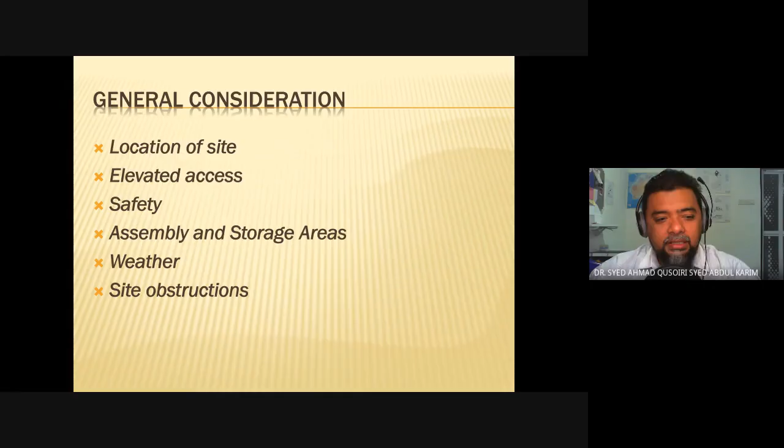So, general considerations of a large span building. There are a couple of them listed here: first is the location of site, elevated access, safety, assembly and storage areas, weather and site obstructions. So first, the location of site.

These large span roofs are often used in stadiums, halls, factories, and other buildings where people can assemble in large numbers. So when we talk about large span buildings, it will involve construction of large span roofs. Most of them likely do not want any type of obstructions, whether for the views of the audience or for the placement of equipment and materials.

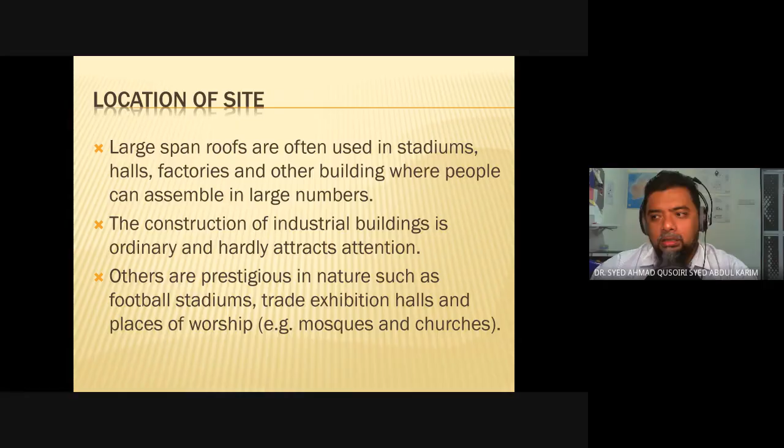The construction of industrial buildings is ordinary and hardly attracts attention because, let's face it, these types of buildings are not as eye-catching as other types of building. Others are prestigious in nature, such as football stadiums, exhibition halls, and places of worship. These are the large span buildings which have a lot more flair to them, so normally they are given a lot more attention in terms of their construction and their designs.

Some buildings are located in built-up areas where the original buildings on the site had been demolished for new buildings. So these are some of the redevelopment projects.

Such sites will face the same problems associated with high-rise buildings in congested sites, such as logistic restrictions, trespassing, security, safety issues, and complaints from neighbors. The project team has to come up with a way to resolve these matters. If the building is a large, prestigious construction, there are normally a lot of cost penalties if completion is delayed.

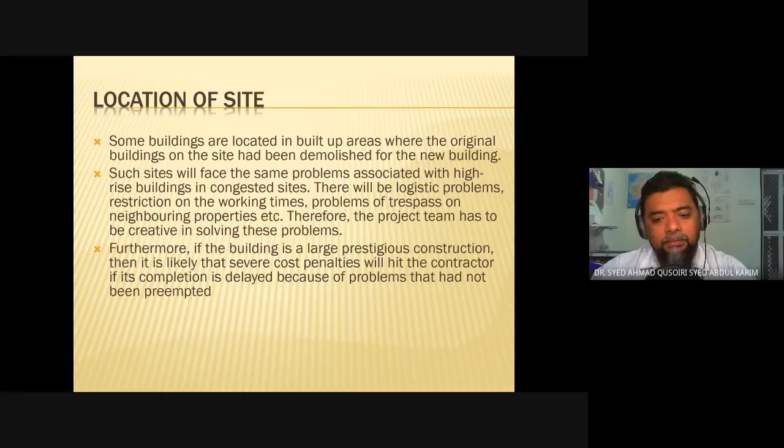Next is in terms of elevated access. Large span roofs have high headroom of from 10 to 50 meters high. So 10 to 50 meters — 50 meters is very high.

So whether the roof is assembled complete or in portions at the ground level, then lifted to its final position — the way they build this large span roof is either assembled at their final position, or assembled at ground level very near to their final position, and then lifted and installed at their final position.

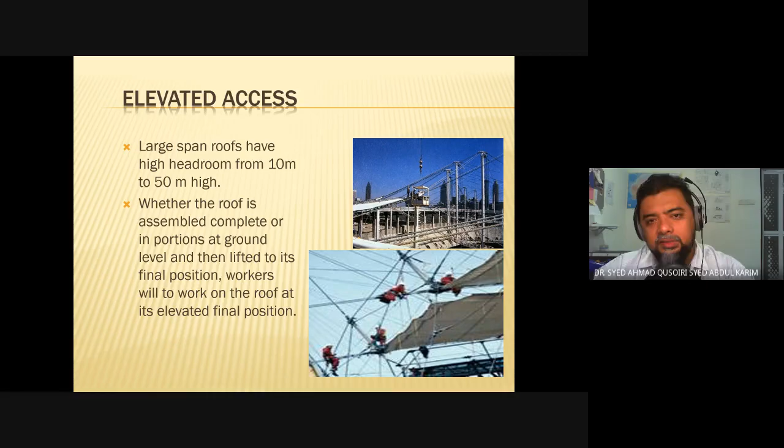However, the second method is the safer method. So elevated access such as ladders, scaffold, and hoist have to be erected, along with mobile scissor lift platforms — these are some of the equipment they utilize to install and maintain those elevated roofs.

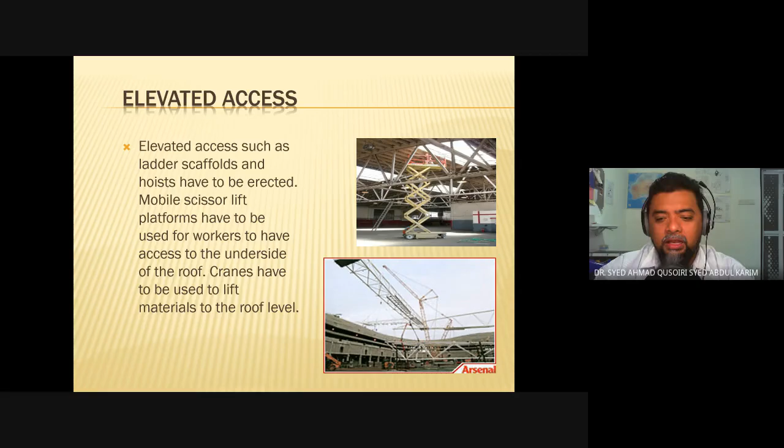We also have cranes, used to lift the materials. And then in case of suspension structures, workers would have to pull themselves up to the roof and abseil down, which involves issues of health and safety.

Hoists will be impractical because of the cables, so this has to be delicately installed. The workers have to balance themselves on the cables that have already been installed so that other cables may be installed. So when they have installed the primary structural cables for the roof, they will have to install the secondary and tertiary cables — this is when we need those workers.

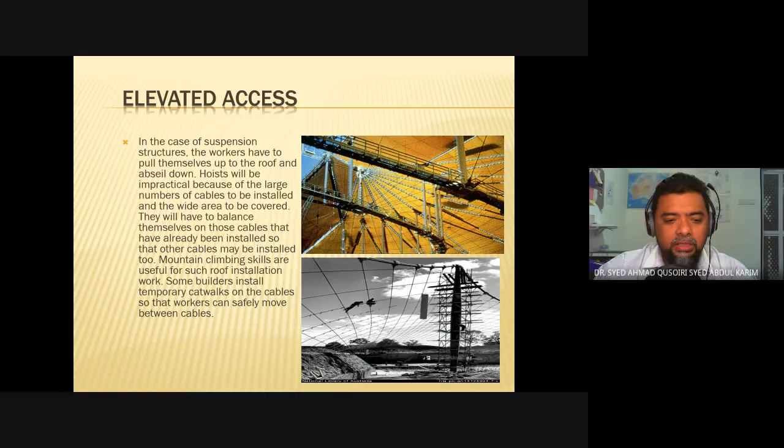Normally, this kind of job is reserved for specialist contractors and specialist workers. Mountain climbing skills are useful for roof installation. Some builders install temporary catwalks on the cables so workers can move safely.

In terms of safety, obviously working at heights is dangerous, so they have to have a lot of safety measures to prevent accidents and death due to falling objects and workers. At certain intervals, they would install safety nets, and workers working at height would have to use safety cables. Safety policy has to be rigorously implemented on site.

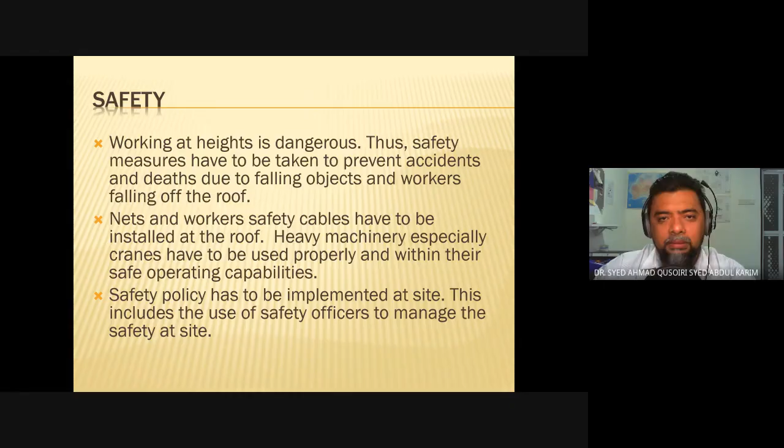Then we have the assembly and storage areas. The production of structure is either in situ or prefabricated, depending on the type. RC large span roofs are still being used for elevated water reservoir roofs — these are some of the types. They are no longer popular for roofs of stadiums and halls because of the development of material technology; we now have other types of material that can last as long as reinforced concrete roofs.

Roof covering has to be inspected after installation, so they have to walk and physically, visually inspect those coverings. Roofs with curved surfaces make it difficult to walk, so workers have to have their safety lines installed and used at all times.

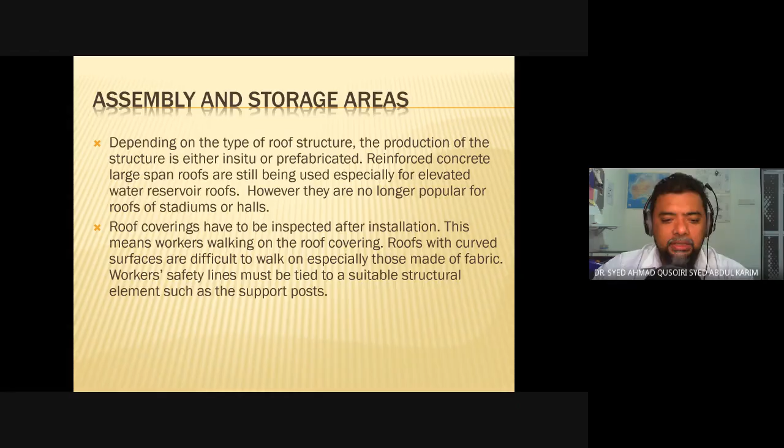So the two possible approaches are these, as I mentioned earlier. First of all, the roof being fully assembled at ground level and then lifted up by crane, jack or winch to its final position. The assembly area is directly below the final position. This provides a lot of access for the workers to install the roof, and is also a lot safer.

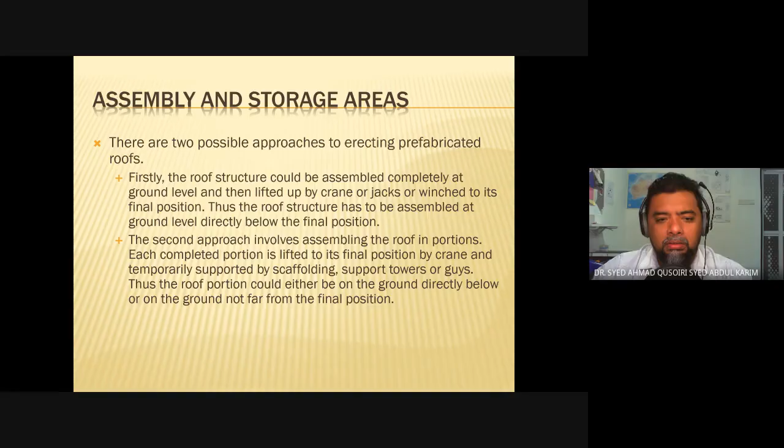The second approach is assembling the roof in portions. Each completed portion is lifted to its final position by crane and temporarily supported. The roof portion could be on the ground directly below, or not far. Okay. So those are the two solutions.

In terms of the components, they must be transported from the factory to where they need to be installed. This limits the size of the components; we cannot have a very large component. Then the components will be stored and inspected, which requires large areas on site to store them. The contractor also has to provide a suitable assembly area for the final installation of the roof.

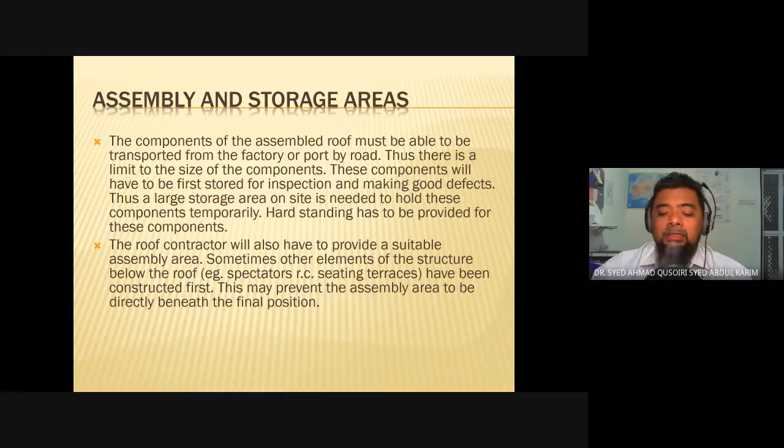Other elements have to be installed first, such as spectator or seating terraces. This may prevent the assembly area of the roof from being directly below the final position, so they have to move to an assembly area not directly beneath, but near its final position. Over here you can see the roof structure, and we have this temporary support or temporary column to support the roof while it is being constructed, and it will be taken out once the roof has been completed.

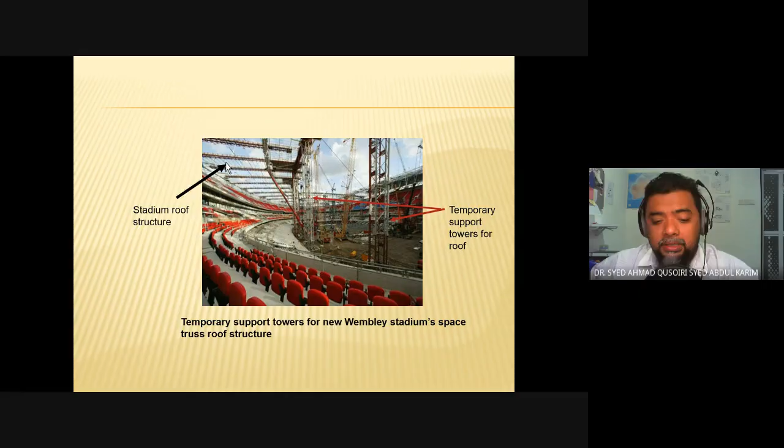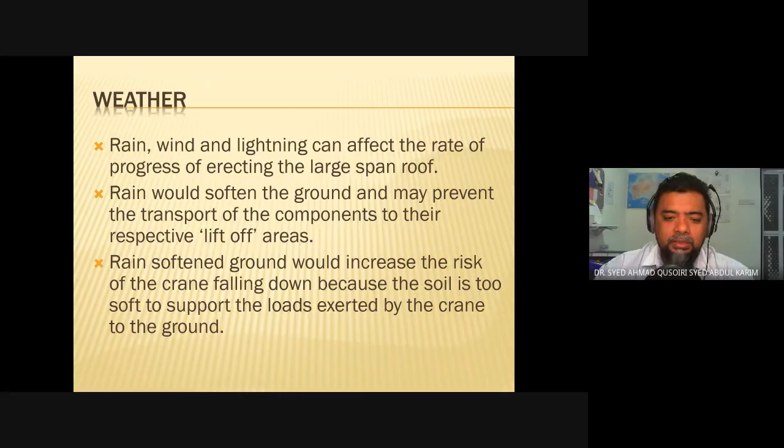Next is weather. Obviously rain, wind and lightning can affect the rate of progress of erecting a large span roof. You do not want to be doing any heavy lifting works in these kinds of conditions. Rain will soften the ground and may prevent the transport of the components to their respective lift-off areas. This could increase the risk of the crane toppling because the soil is too soft to support the loads exerted by the crane on the ground.

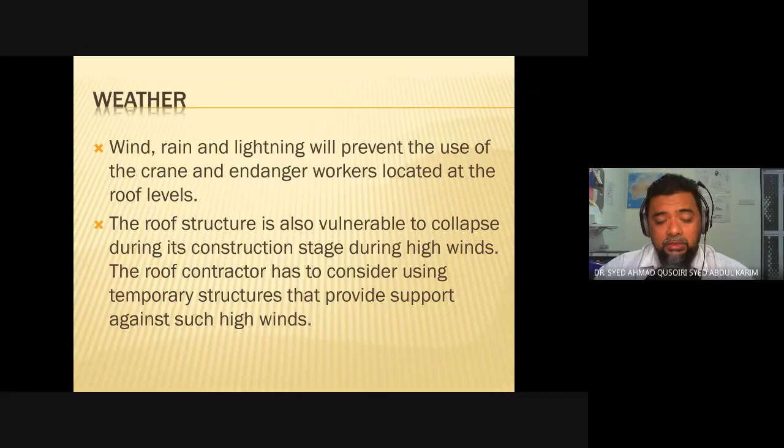Wind, rain, and lightning will prevent use of the crane and endanger workers. The roof structure is also vulnerable to collapse, so you do not want to be doing long span roof construction during the rainy or thunderstorm season. It is vulnerable to collapse during high winds, so that's why they have all those temporary structures to provide extra support to the uncompleted roof.

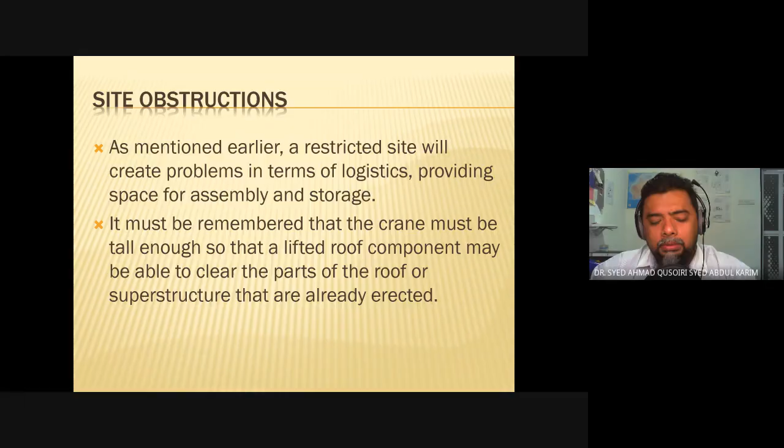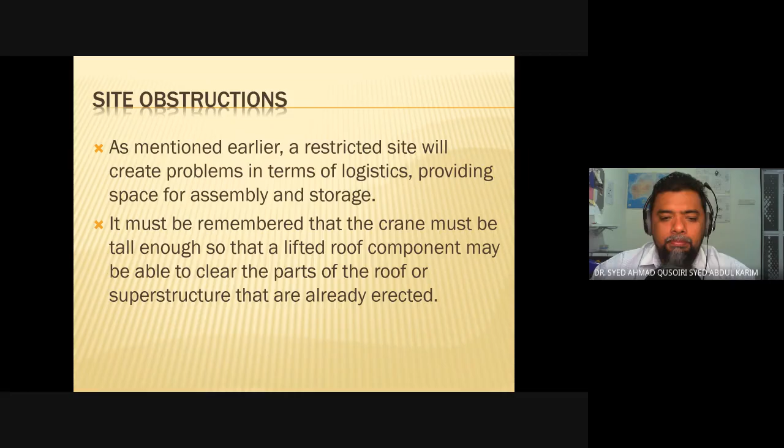Next is site obstructions. A restricted site will create problems in terms of logistics and providing space for assembly. Here the project manager has to be able to make use of the available space on site. Okay? It must be remembered that the crane must be tall enough so that a lifted roof component is able to clear parts of the roof or superstructure.

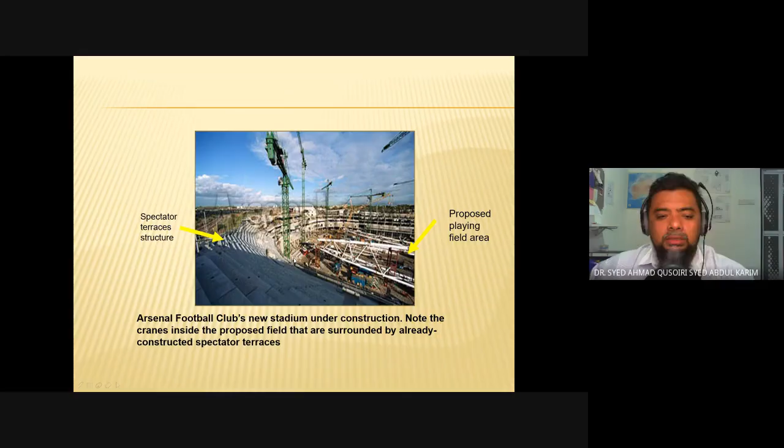Next is dome construction. These are special buildings. Basically, the dome is a three-dimensional arch. The arch is one of the strong elements of the structure, widely used in ancient times to create large span roofs. The roof covering was placed over a row of arches to create a large span roof. So this is the second oldest method of providing a roof that has a great span.

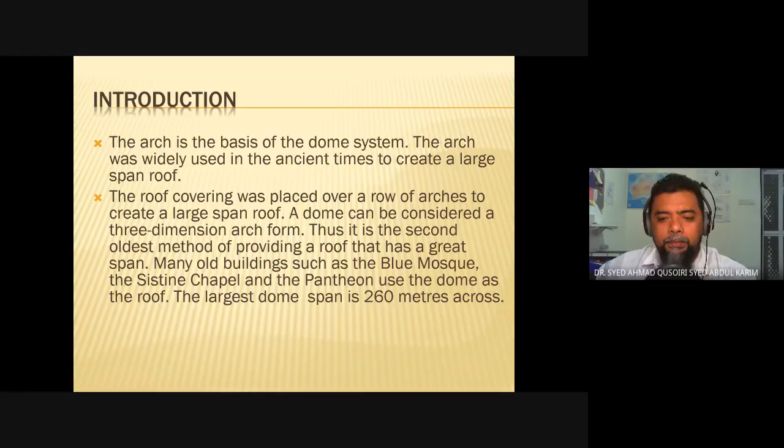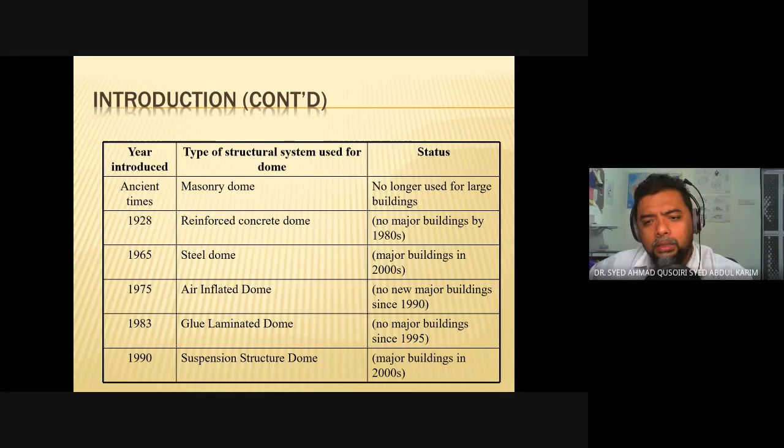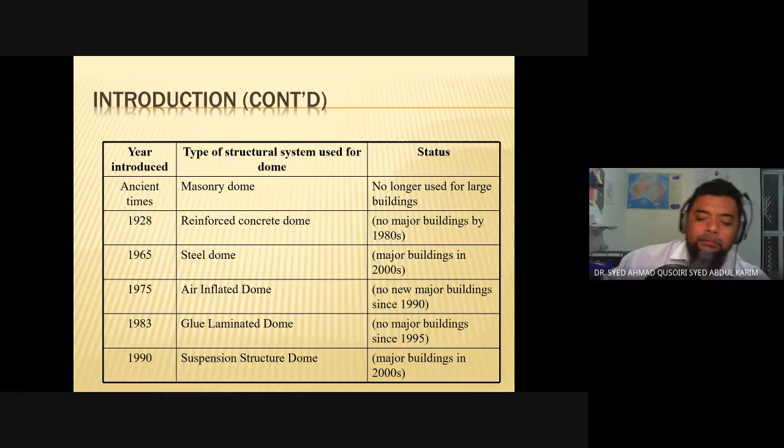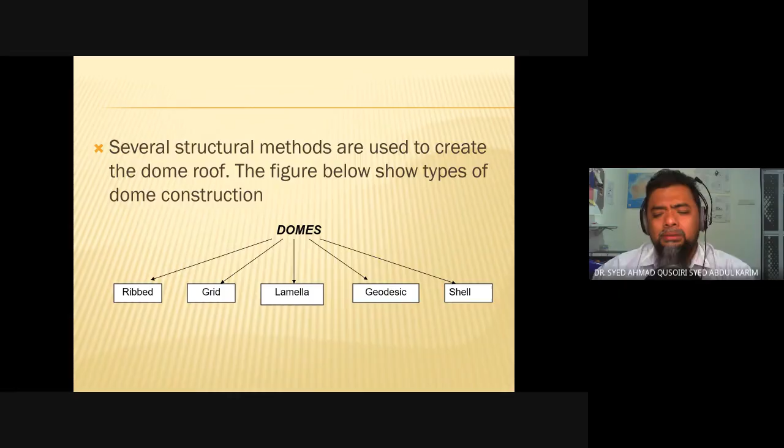Several structural methods are used to create the dome roof. These are some of the types of domes available. The rib dome consists of an arrangement of rib members on a ring beam support that converges on either a crown connector or crown compression ring. So that is the ring beam we are talking about. If it's at the top, it's known as the crown ring.

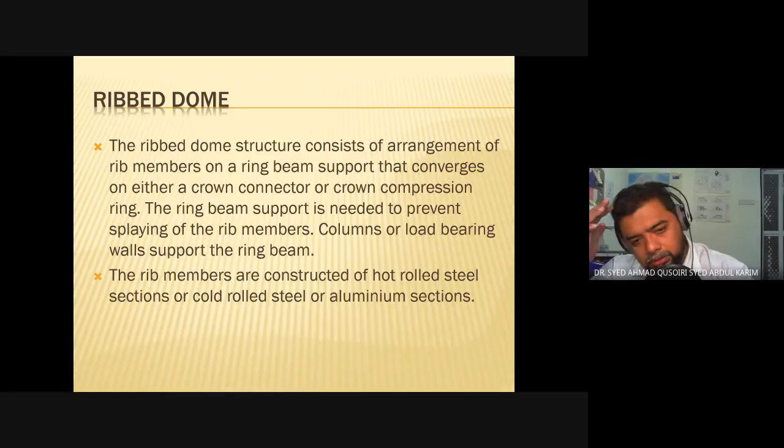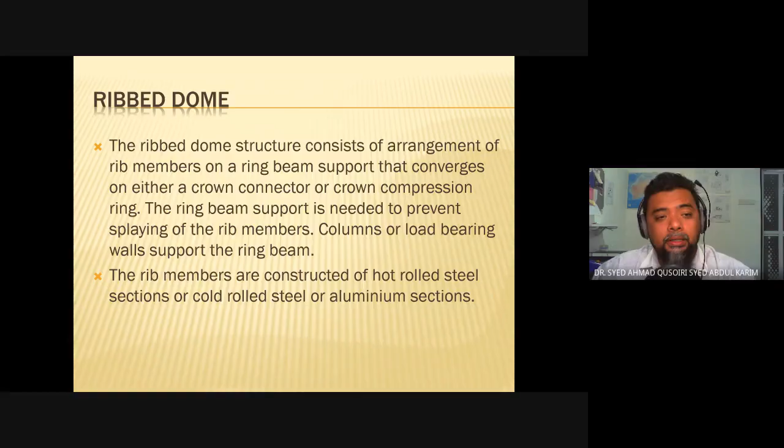So the rib members are constructed of hot rolled steel sections. This depends on the design of the buildings. The material for the ribs can be anything. Okay. So in rib domes, the framework of the rib members must be braced to provide rigidity, thus resisting the wind loads acting on the finished dome.

So the rib members are connected together by this ring beam. So you can consider the rib as the columns and the ring beam as the actual beam. They need each other in order for the dome to be stable. So purlins are installed on the ribs to support the roof cover. This is exclusively for the purpose of placement of roof covering.

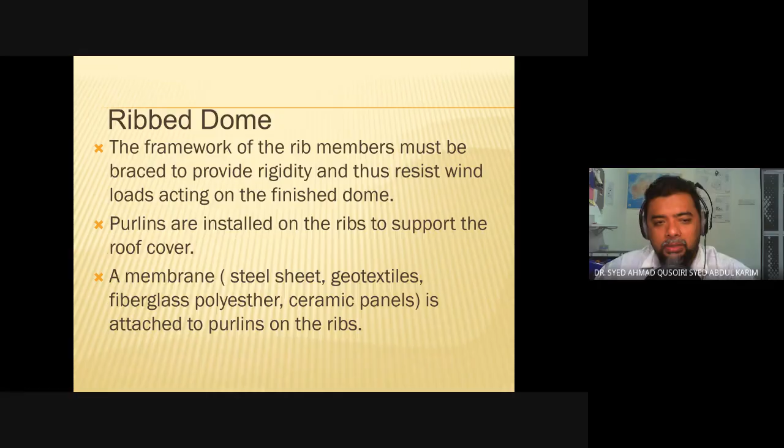A membrane, either made out of steel sheet, geotextile, fiberglass, polyester, or ceramic panels, is attached to the purlins on the ribs. The membrane provides a weatherproof roof cover over a dome. A false dome ceiling is then attached to the underside of the framework.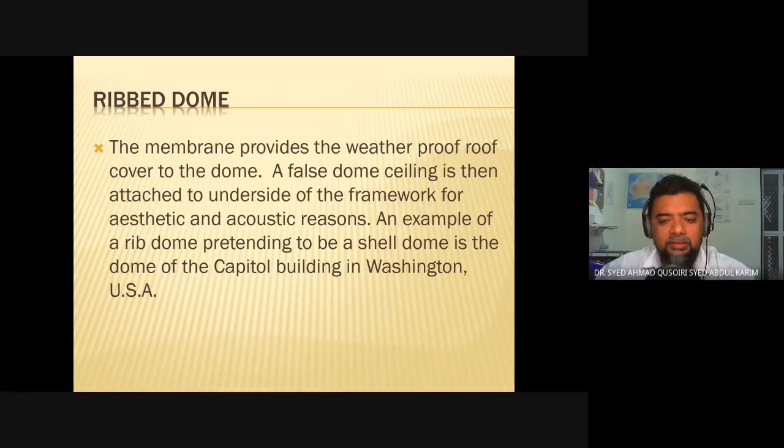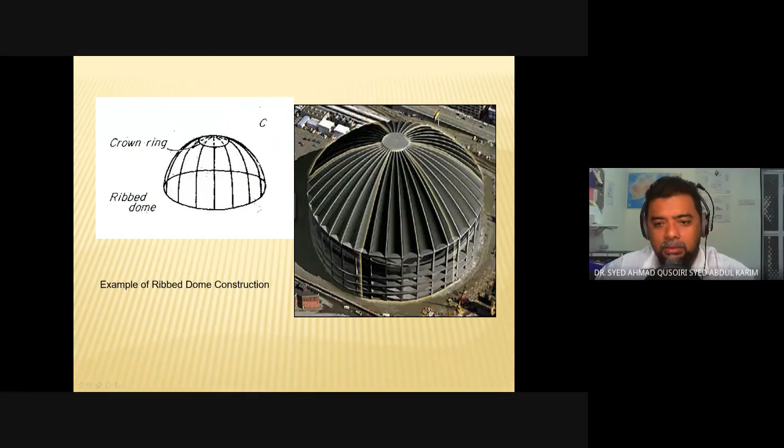And so that is the example. This is the structure itself. Obviously, there will be a lot more ring beams. And the dome again depends on the design.

Next, we have the grid domes. So this is an innovation from the flat grid roof types. So this is the grid dome. A grid framework is curved to provide the dome shape. So instead of a flat grid, we now have a curved grid, so it becomes a dome. A ring beam is provided at the base again to transfer loads of the beam to the supporting column, wall, or the foundations.

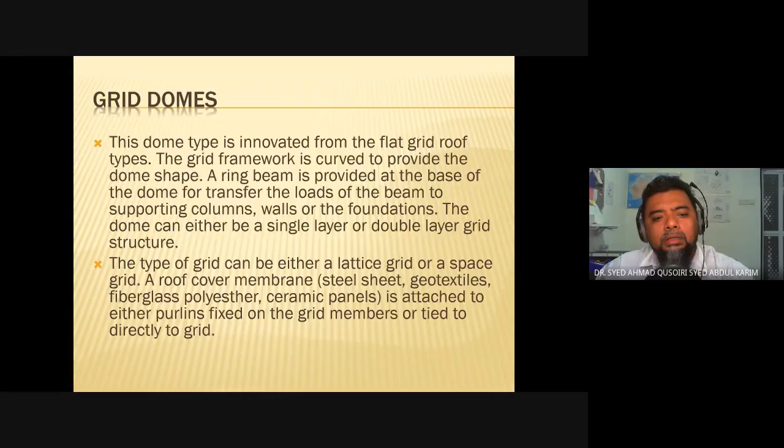The dome can either be single layered or double layered. Typical grid is either a lattice grid or a space grid. The roof cover membrane, again, is attached to purlins, or if you do not want to use any purlins, it can also be installed directly to the grid. So this is a grid dome that uses steel for the structure and, let's see, for the finishing, it seems to be using glass.

Okay, and then lamella domes. So this is an example. It's a type of grid roof. It looks like a grid dome. However, a grid dome system will use connector components for assembling the longitudinal grid components together. The lamella members are joined together without using connector components. The connections are usually pin jointed.

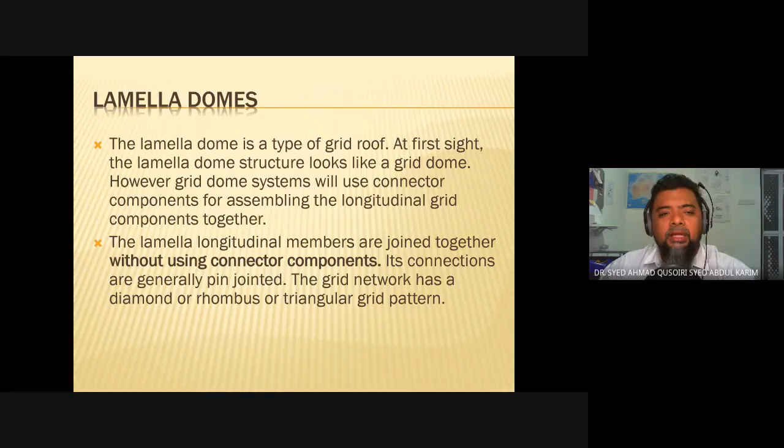So the grid network has a diamond, rhombus, or triangular pattern. The difference here is just in terms of connecting the members, where lamella domes do not use any type of connectors. Another example of a lamella dome in large scale.

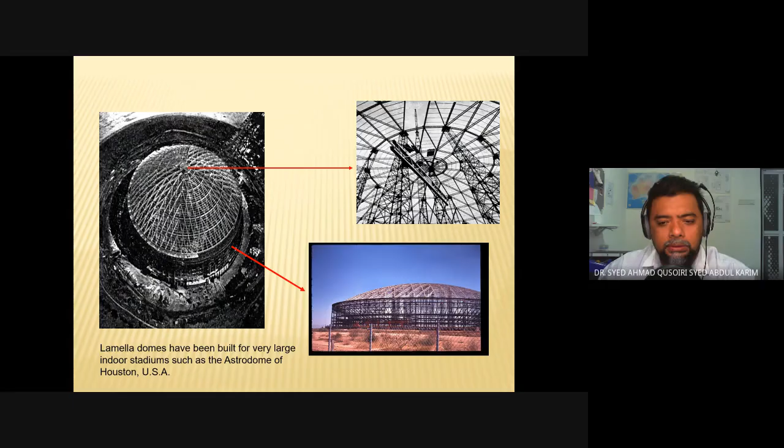Next is the geodesic dome. So this is an example. Of course it's still a grid roof. It looks like lamella and grid domes, but the difference lies in the configuration of the grid line. The grid lines follow a pattern of points of intersecting geodesic lines. So the difference here is just in terms of the lines.

A geodesic line is defined as a line that circumvents the surface of a sphere. The points where geodesic lines crisscross each other are known as geodesic points. Members of a geodesic frame are not geodesic, but the positions of their connections are geodesic. Meaning that geodesic domes are different only because of the design of the lines, not because of the use of connectors. So it's just in terms of design.

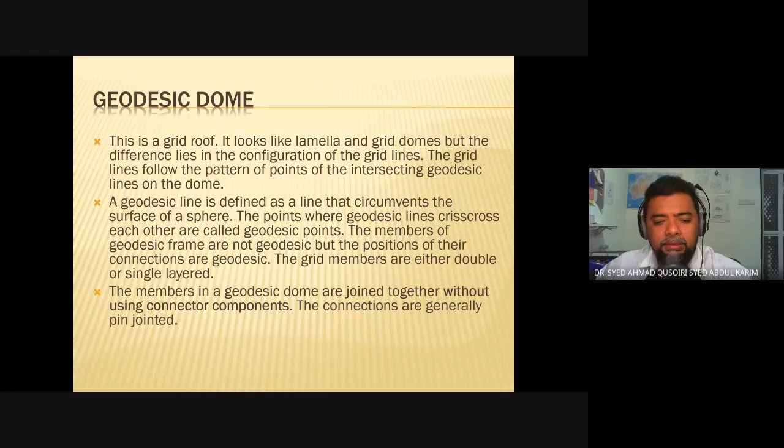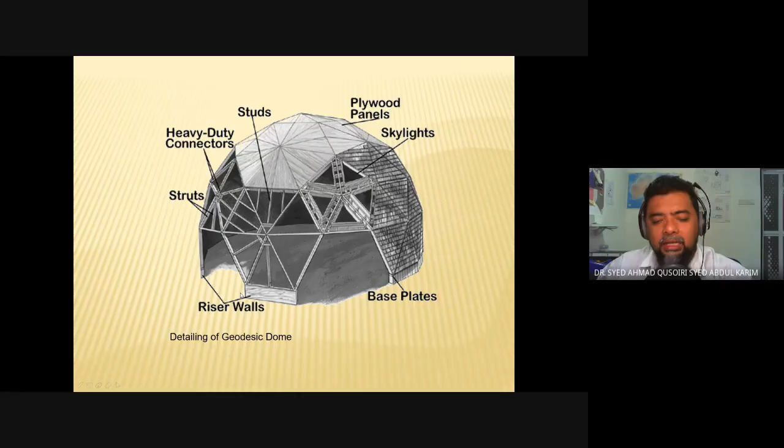So the grid members are either double or single layer. The members in a geodesic dome are joined together without connectors. So they also do not have any connectors, and because of their very oddly shaped lines, they are called geodesic domes. Another example of a geodesic dome.

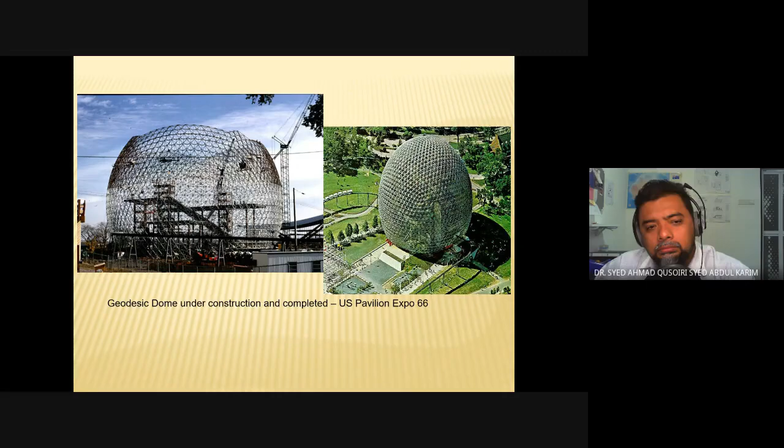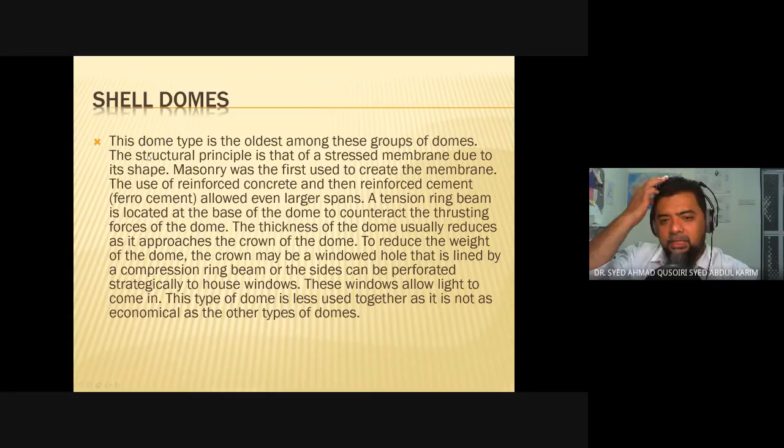Next is the shell domes. So this is an example of a shell dome. This is the oldest among the types of domes. The principle is that of a stressed membrane due to its shape; masonry was used to create a membrane. Use of RC, reinforced concrete, allows for larger spans. And they have a tension ring beam located at the base. And the thickness of the dome reduces as it approaches the crown.

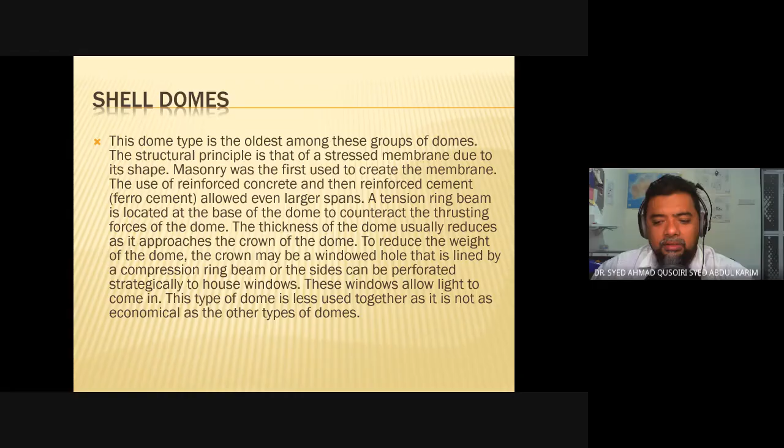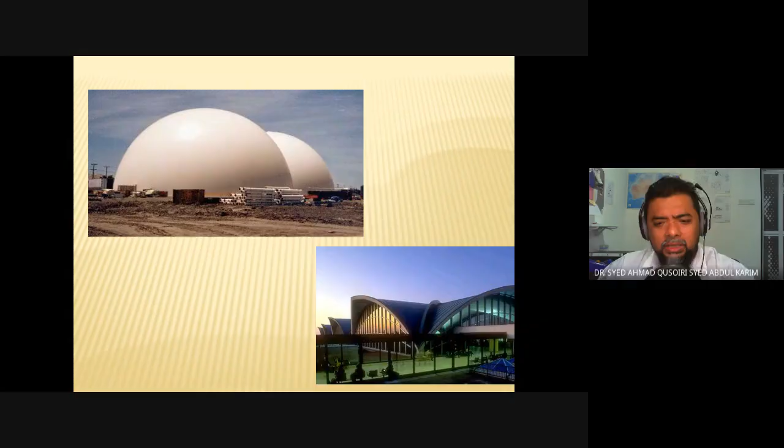To reduce the weight of the dome, the crown may have a windowed hole that is lined by a compression ring beam. So we also have a ring beam at the top and the sides. These windows allow light to come in, and this type of dome is less used. The construction of these shell domes is not as economical as other types of domes, but it is truly a unique type of dome.

Okay, so with that, we've covered the topic of large span buildings and domes.